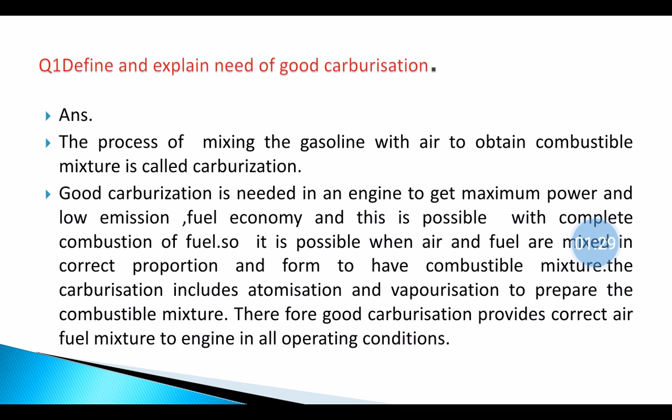So when air and fuel are mixed in correct proportion, then only combustion will be complete. So to have this combustible mixture, carburation includes atomization and vaporization to prepare the combustible mixture. Therefore good carburation provides correct air fuel mixture to engine in all operating conditions. Question number 2, carburation and atomization.

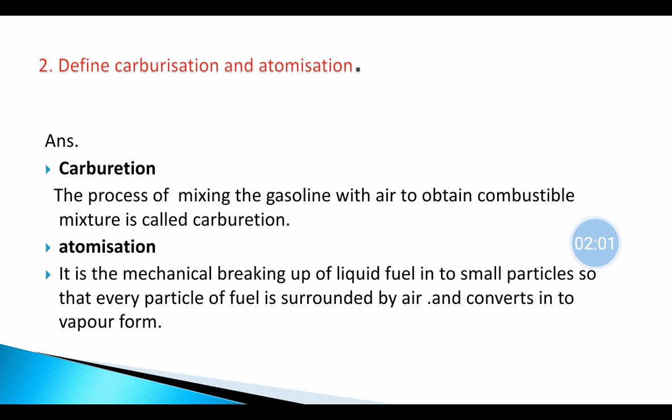What is meant by carburation? The process of mixing the gasoline with air to obtain combustible mixture is called carburation. Definition of atomization: it is the mechanical breaking up of liquid fuel into small particles so that every particle of fuel is surrounded by air and converts it into vapor form. Only you have to write the definition.

Define atomization and vaporization. What is meant by atomization? It is the mechanical breaking up of liquid fuel into small particles so that every particle of fuel is surrounded by air and converts it into vapor form. Vaporization means it is the change of state of fuel from liquid to vapor. It is required for complete combustion. Due to vaporization, fuel and air form the combustible mixture.

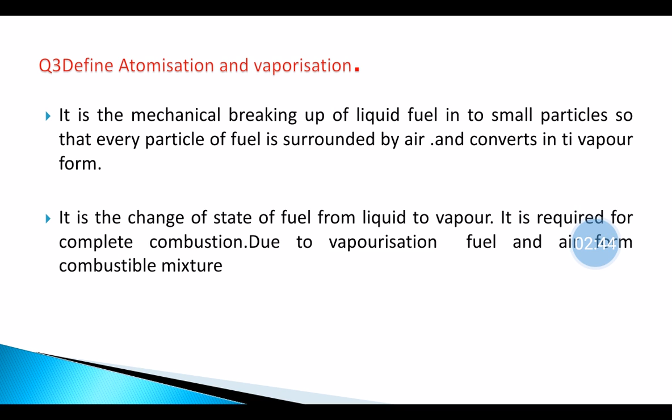Question number 4, define and explain need of good atomization. So again, atomization definition: it is the mechanical breaking up of liquid fuel into small particles so that every particle of fuel is surrounded by air and converts it into vapor form. Now what is the need of good atomization?

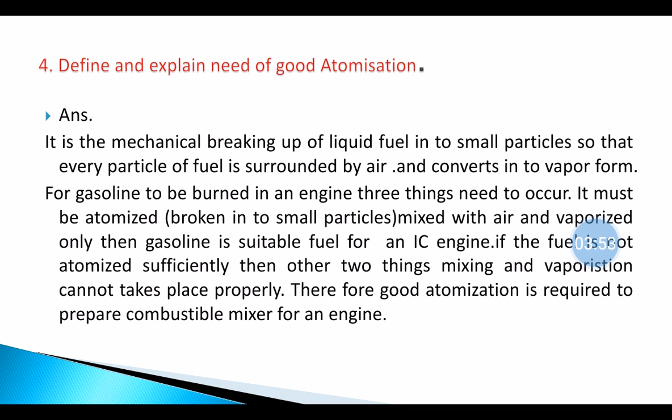So gasoline or petrol to be burned in an engine, it consists of 3 steps to occur. It must be atomized or broken into small particles, second step, mixed with air, and vaporized. So these are the 3 processes. Only then gasoline is suitable fuel for an IC engine. Means these 3 steps will prepare the mixture for the combustion. If the fuel is not atomized sufficiently, then the other 2 things, mixing and vaporization, cannot take place properly. Therefore good atomization is required to prepare combustible mixture.

Define and explain need of good vaporization. So again, definition already discussed, and that is, it is the change of state of fuel from liquid to vapor. It is required for complete combustion. Now what is the need of good vaporization? It is important. A good vaporization is required for better combustion in an engine cylinder.

If the vaporization is good, most of the fuel droplets are converted into vapor and complete combustion and smooth combustion takes place. So when there is a smooth combustion, complete combustion, whatever the fuel supplied, that is converted into power. Means power output of the engine increases, and when there is a complete combustion, emission reduces and the engine also operates smoothly. Therefore good vaporization is needed.

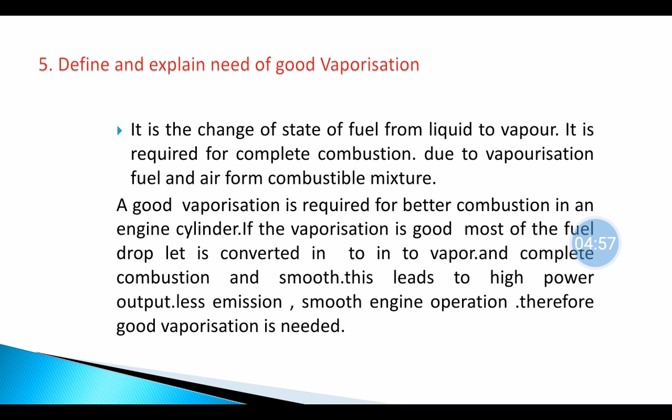Sixth, list the requirements of carburetor. So carburetor has to perform certain operations, or it has to provide the correct amount or proportion of fuel. So first requirement here is it should supply proper quantity and proportion of fuel in all conditions. It should start the engine easily from cold conditions. Should supply minimum quantity of fuel in idling. It should supply rich mixture for heavy loads and under slow speeds and for hill areas. For cruising or high speed operation, it has to provide the lean mixture.

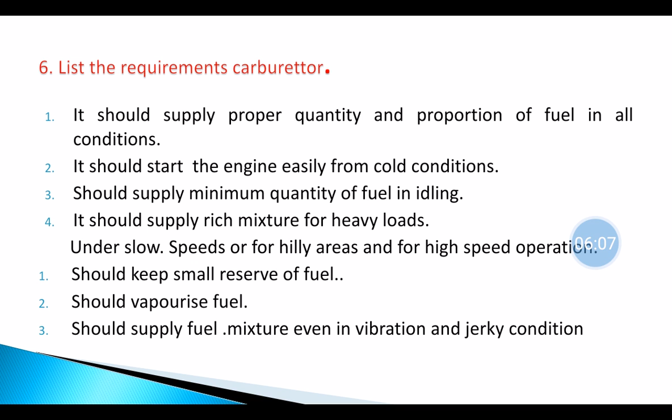Should keep small reserve of fuel, means it has to store the fuel in the carburetor. Should vaporize the fuel. Should supply fuel mixture even in jerky or vibrating conditions, because vehicle may come across any condition, there may be jerk or vibration, so carburetor should not stop supplying the fuel.

Question number 7. Explain the limitations of simple carburetor. It provides increasing richness. It is the characteristic of the simple carburetor. When the speed increases, it goes on supplying rich mixture, but that is not required. At high speed or at normal speed, we should not supply the rich mixture. It provides lean mixture at low speed, but actually at low speed and starting, rich mixture is required.

Starting difficulty. Simple carburetor provides lean mixture at the starting, because at low speed it provides lean mixture, but actually rich mixture is required, so choke is necessary. And in old days they used to use the ticklers. Ticklers means which will press the float to supply extra fuel. Then idling difficulty. Rich mixture is not provided by simple carburetor at idling.

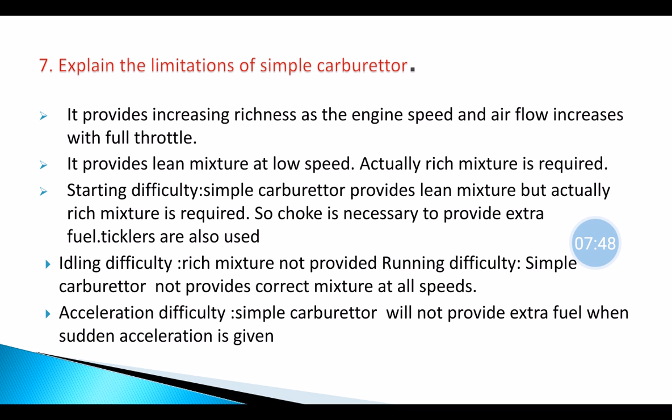Running difficulty. Simple carburetor does not provide correct air fuel mixture at all speeds. Acceleration difficulty. Simple carburetor will not provide extra fuel when sudden acceleration is given. So simple carburetor was the basic carburetor, and it did not have the different circuits, but modern carburetors have all these circuits to overcome the drawbacks.

Now explain the meaning of stoichiometric, rich and lean mixture. So what is meant by stoichiometric air fuel ratio? The theoretical or ideal air fuel ratio for complete combustion is called stoichiometric air fuel ratio. For gasoline engine, the air fuel ratio is 14.7:1. This means to burn completely 1 kg of fuel, we need 14.7 kg of air, and this is considered as stoichiometric or chemically correct air fuel ratio, but that cannot be achieved.

Lean mixture. It is the air fuel mixture containing relatively low proportion of fuel, caused by too little fuel or too much air. So that leads to a leaner air fuel mixture. Greater than 14.7, such as 17:1 or 18:1, means lean mixtures. Rich mixture. A mixture with ratio less than 14.7 is considered a rich air fuel mixture, meaning more parts of fuel compared to lean mixture. 17:1 is leaner than 13:1, which means 13:1 is richer than 17:1. So we can explain these air fuel mixtures like this.

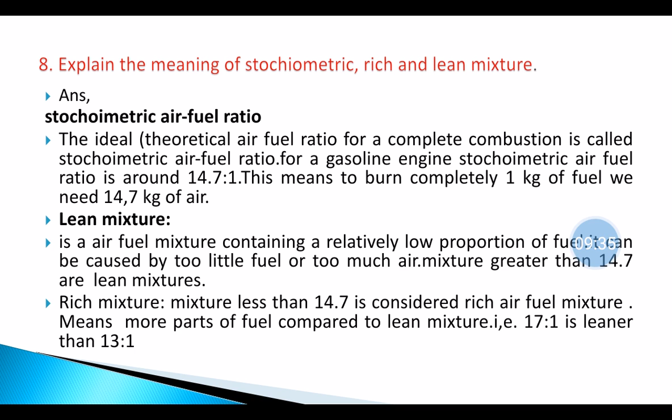Now question number 9. Explain the need of rich mixture during idling. During idling, the engine has just started or is heated. After starting, much vaporization is not taking place, or vaporization is not fast, and pressure inside the cylinder is also less, and there is also a possibility of mixture dilution by the exhaust gases, which will keep the fuel particles from coming in contact with air. So to keep the engine running, we need more fuel to get faster vaporization and a combustible mixture. Rich mixture is provided.

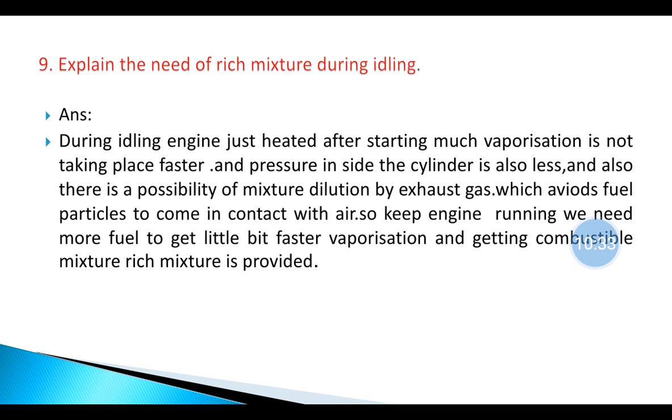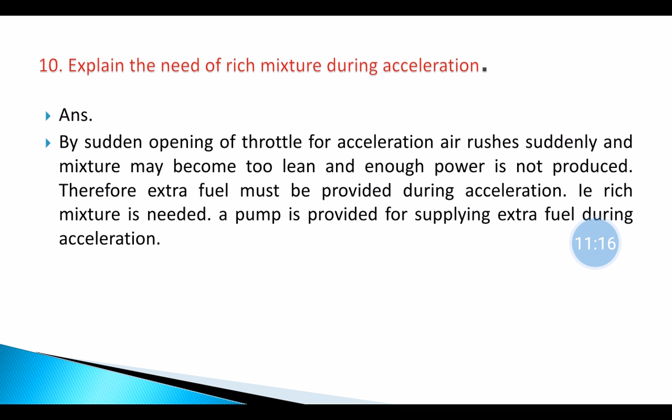Question number 10, explain the need of rich mixture during acceleration. Again here, by sudden opening of throttle for acceleration, air rushes in suddenly and the mixture may become too lean and enough power is not produced. Therefore, extra fuel must be provided during acceleration. That is, rich mixture is needed. A pump is provided for supplying extra fuel during acceleration. The amount of air induced will be more, so automatically the mixture will become leaner, and that is not required. Rich mixture we have to provide, so extra fuel is provided.

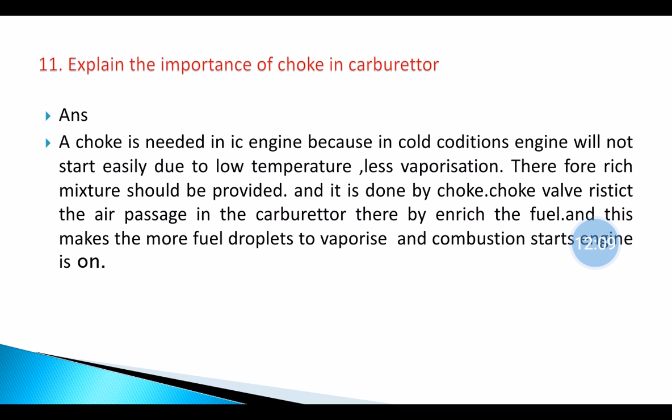Explain the importance of choke in carburetor. A choke is needed in IC engine because in cold conditions the engine will not start easily due to low temperature, low pressure, less vaporization, etc. Therefore, rich mixture should be provided, and it is done by choke. The choke valve restricts the air passage in the carburetor, thereby enriching the fuel, and this supplies more fuel droplets to vaporize and combustion starts immediately. So that is the purpose or importance of choke.

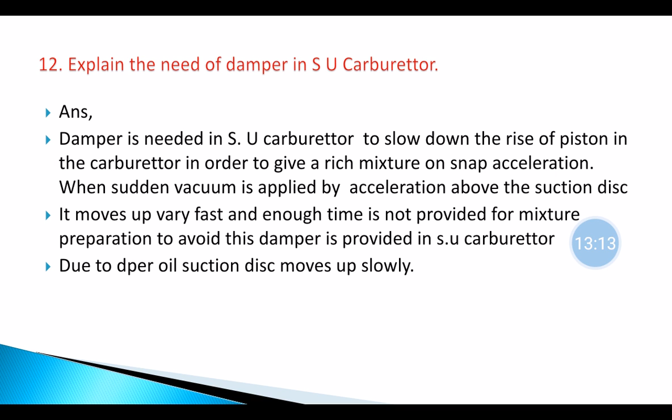Question number 12, explain the need of damper in SU carburetor. The SU carburetor has a damper above the suction disc. The damper is needed to slow down the rise of the piston and suction disc assembly in the carburetor in order to give rich mixture on snap acceleration. When sudden vacuum is applied above the suction disc during acceleration, it moves up very fast and enough time is not provided for mixture preparation. To avoid this, a damper is provided, which consists of hydraulic oil and a piston, so it will not allow the suction disc to move very fast, and it moves the disc slowly. Now 10 marks questions.

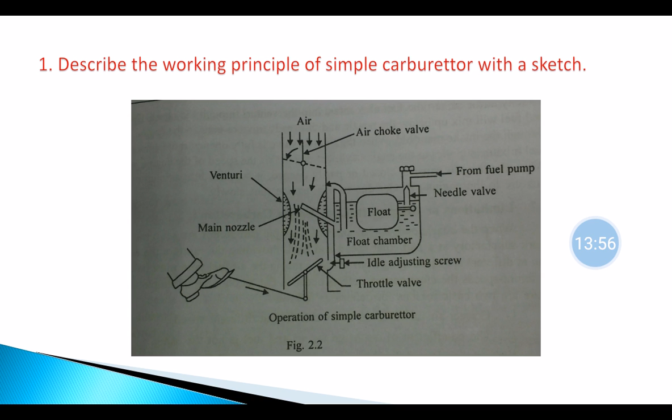So under this 10 marks question, first question is describe the working principle of simple carburetor. So simple carburetor is shown here. So what are the components of simple carburetor? It consists of a float chamber, then there is a throttle valve, choke valve, then main nozzle or jet, main jet, then there is a needle valve, fuel inlet, etc. We can draw the sketch and label the parts and explain the working.

It works on Bernoulli's principle. The fact that when the velocity of air increases, a pressure drop takes place in a particular cross section, that is in the venturi. So this principle is used. When the velocity increases, pressure drops, and fuel at that cross section comes out. Always fuel is maintained in the float chamber by needle valve and float.

Simple carburetor consists of a float chamber to maintain always a small reserve of fuel with float and needle. Whenever the fuel level increases, the float will rise and reach the upper portion, and the needle valve will close the inlet. When the level comes down, again it opens. Venturi is provided in the simple carburetor, and it is a reduced cross section to increase air velocity. That is, the reduced diameter is called venturi.

Then we have a nozzle with an orifice to supply the fuel. That is connected to the float chamber. Then the throttle valve to control the airflow. The rate of airflow is controlled by the throttle. Throttle valve is connected to the accelerator pedal, and it controls the airflow. During the suction stroke, air is drawn through the venturi. Venturi is a tube of reduced cross section which offers less resistance to the airflow. The air passing through the venturi increases in velocity, and pressure in the venturi drops.

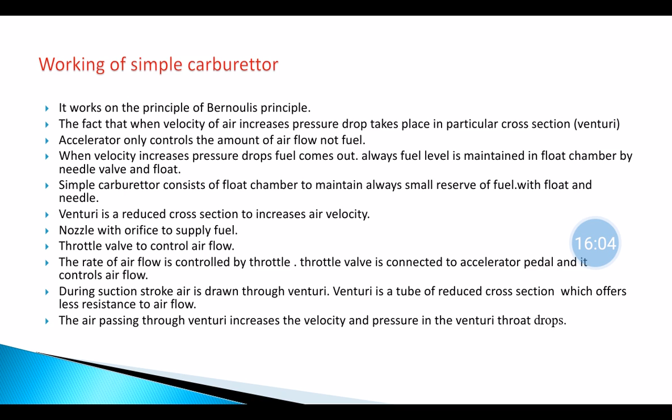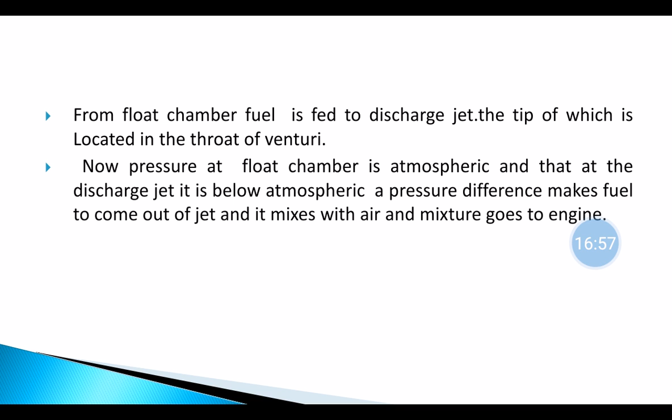So fuel from the float chamber is fed to the discharge jet, the tip of which is located in the throat of the venturi. As the air velocity increases, the pressure at the throat of the venturi drops, and the pressure at the float chamber is atmospheric, and that at the discharge jet is below atmospheric. A pressure difference called carburetor depression takes place there, and the fuel automatically comes out of the jet and mixes with air, and the mixture goes to the engine. So this is how the simple carburetor works.

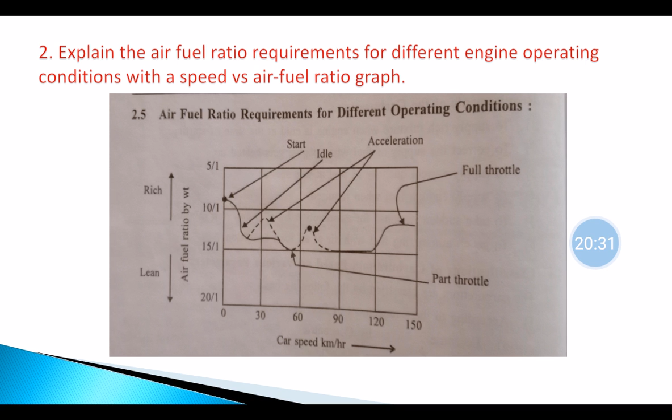For acceleration at any speed, the throttle is suddenly opened, and a momentary enrichment is required. Now two examples at 25 km per hour and 45 km per hour are shown with dotted lines. So at different speeds, acceleration is shown here. At these speeds 25 km and 45 km, the dotted lines indicate the acceleration, meaning again the mixture becomes rich, momentarily goes rich, and then goes leaner.

So at starting and cold condition, rich mixture is provided because the engine is cold and vaporization is poor. Rich mixture increases the vaporization. More and more fuel droplets will be in contact with air, vaporization will be faster, so that immediately or suddenly the engine will start.

Similarly, by sudden acceleration, more air rushes in, so it needs extra fuel, otherwise the mixture will become leaner and leaner and it may not cope up with the requirement. So enough power is not generated if we don't provide the extra fuel. Then the carburetor must be designed to supply the correct air fuel mixture for all operating conditions. So this is the mixture strength requirement and it is explained with a graph.

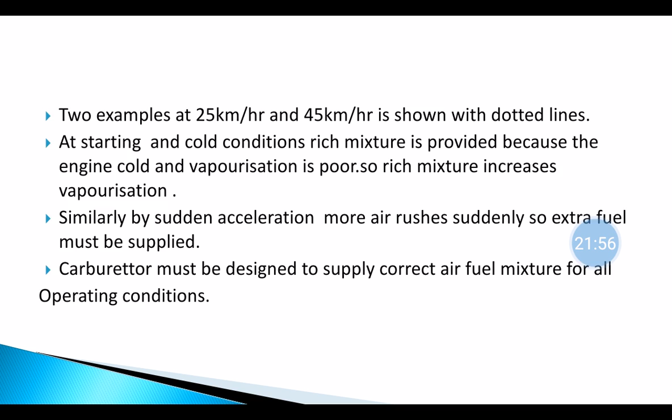Now question number 3 here: list various fuel circuits of SU carburetor and explain cold start circuit with a sketch. So this sketch you can draw for any question on SU carburetor. So here the question is to list the fuel circuits of SU carburetor, listing, and explain the cold start circuit with a sketch. So before that we can study a little bit about the working.

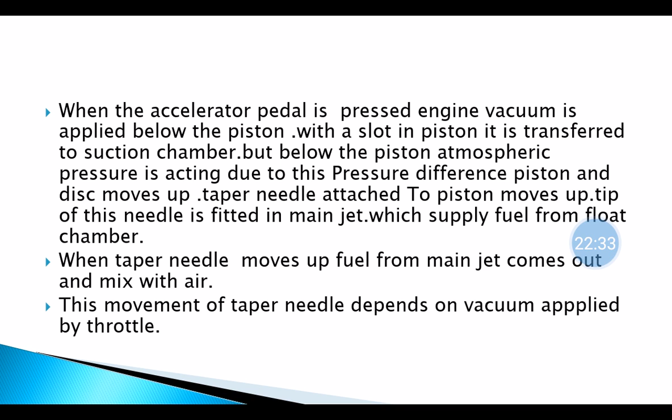The main components of this SU carburetor are the suction disc, then the taper needle which is fitted inside a jet, and the float chamber supplying the fuel. Then air is passing through the throttle valve, and this suction disc has a hole which will connect above the suction disc, so that is the vacuum chamber. One more air rectifier hole applies atmospheric air below the suction disc, and there is a damper provided at the top. Okay, so how does this SU carburetor work?

Depending on the throttle opening, air is passing from left side to right side, so this applies engine vacuum, and this vacuum is connected through the hole in the piston above the suction disc. So when the vacuum is applied at the top side and the air horn or air rectifier is applying atmospheric pressure at the lower side, automatically the suction disc will move up and the taper needle attached to it comes out of the jet, and this taper needle has a varying area of cross section. Due to that, more and more fuel comes out, then the mixture becomes rich, and this air fuel mixture is supplied to the engine.

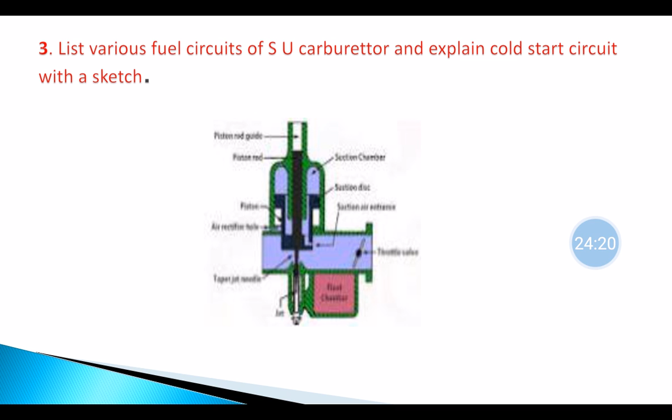So it depends on the position of this piston and suction disc assembly, and this is achieved by applying the vacuum above the suction disc. So this is the simple working and the different circuits of SU carburetor. Actually this SU carburetor does not have various circuits, but it performs the function of all these circuits automatically. So it consists of starting circuit, idling circuit, normal running, acceleration circuit. But out of this, the cold starting circuit,

So during cold starting, rich mixture is required. For this, the jet tube is lowered away. So there is a mechanism, and that mechanism is connected to the dashboard through a cable. So at the starting, when the driver pulls that cable, that will lower the jet tube down automatically. So when the jet tube comes down, the taper needle cross section will be lowered there, and more amount of fuel comes out, by means of the jet lever, thereby enlarging the jet orifice. So when the driver operates that cable, in the cold starting circuit the jet tube is moving downward, supplying more amount of fuel, and that is the cold starting circuit.

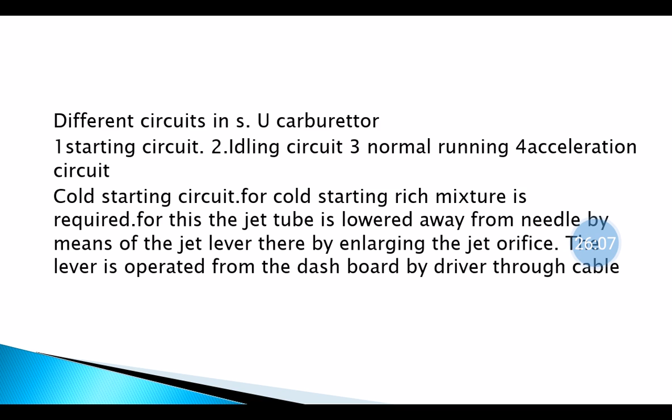Okay, so with this same sketch you can explain, but we have to show the movement of that jet tube. For that we can provide one cable there. Then one more question: list various fuel circuits of SU carburetor and explain idling circuit with a sketch. So here the same sketch you can draw, a simple sketch of SU carburetor, and there is no separate idling jet or acceleration pump, since constant high air velocity across the jet is maintained even under idling conditions, and there is no necessity of a separate idling jet in SU carburetor.

So you have to draw the same sketch but explain the idling circuit, and that is for 10 marks. So the SU carburetor we have to explain, and along with that, list out the circuits here, again the same circuits, and explain the idling jet or idling circuit for the SU carburetor.